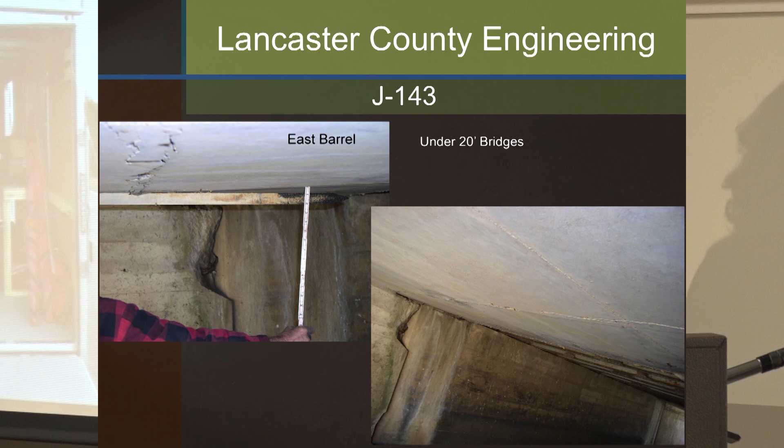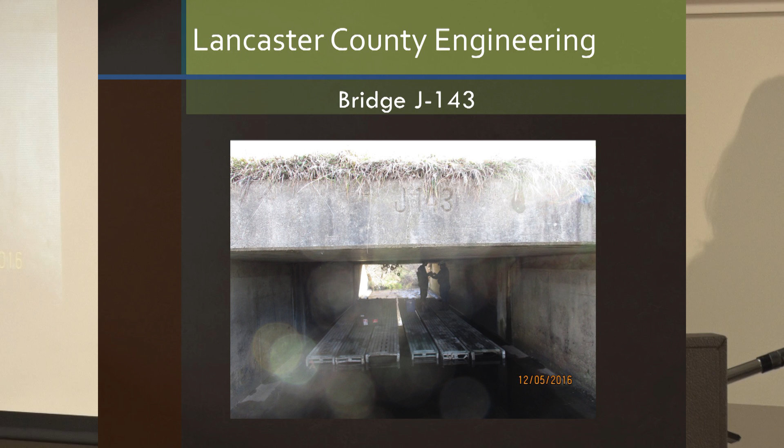If you can look at the next picture here, this is the University of Nebraska-Lincoln's mobile bridge load testing unit, and they were able to bring that out to the site, and we were able to actually instrument the bridge. The bridge, because it has a box culvert on either side and dirt actually in the middle, also has a rather large scour hole. So we couldn't stand on the dirt and instrument the bridge. We actually had to get scaffolding, and the university personnel, along with Lancaster County personnel, crawled across this scaffolding to instrument this bridge.

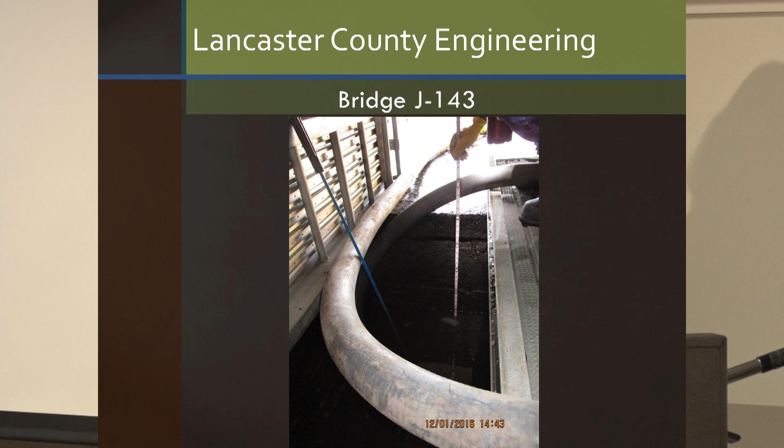If you can look at this picture, it's actually a picture showing that we did have to pump out the area between the two box culverts so that we could figure out what was going on and how big the void was in that area. Then the university began the instrument process, and here you can see one of the old 1938 bridge beams that has been prepped for a strain gauge.

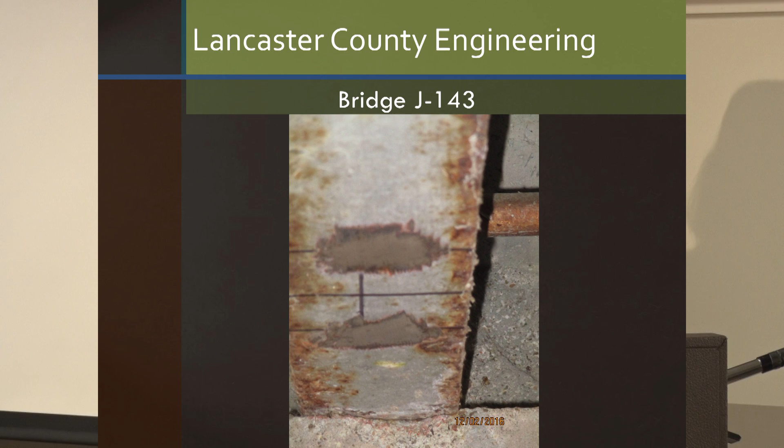I like to explain these strain gauges to people, like if you've ever had children, this is the type of strain gauge they put on your stomach to measure how intense the contractions are. It's the same sort of gauge, same sort of instrumentation, but for bridges.

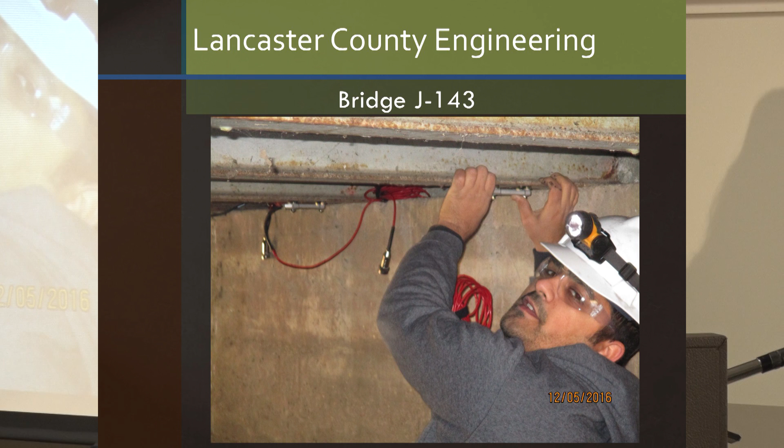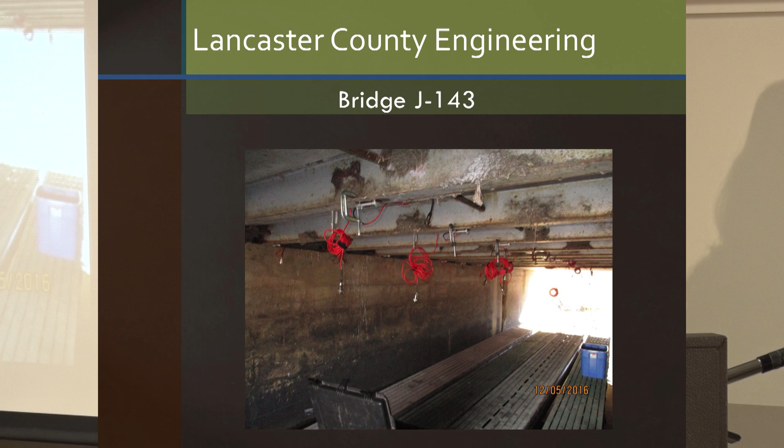Here is a picture of Ali, and he's not really a poser. Most engineers aren't, but he's simply holding his head out of the way so you can see what these gauges look like, although I will note that he does look great. Here's a close-up picture of the gauge and what it looks like. And you can see from this picture that several gauges were actually placed on this bridge so that we could determine how it behaved when a load was put on the bridge.

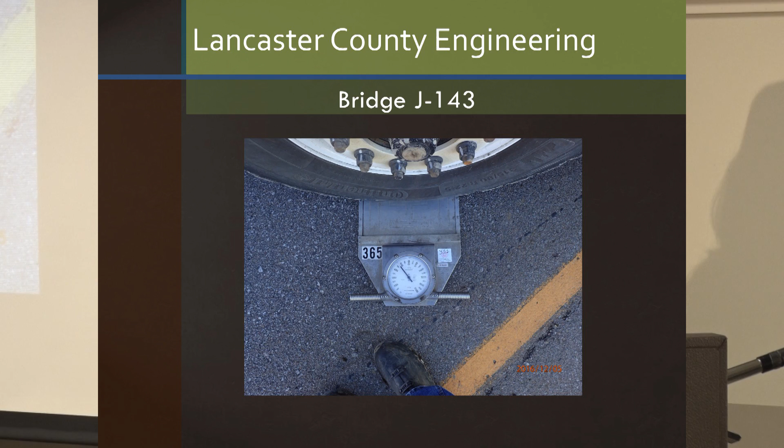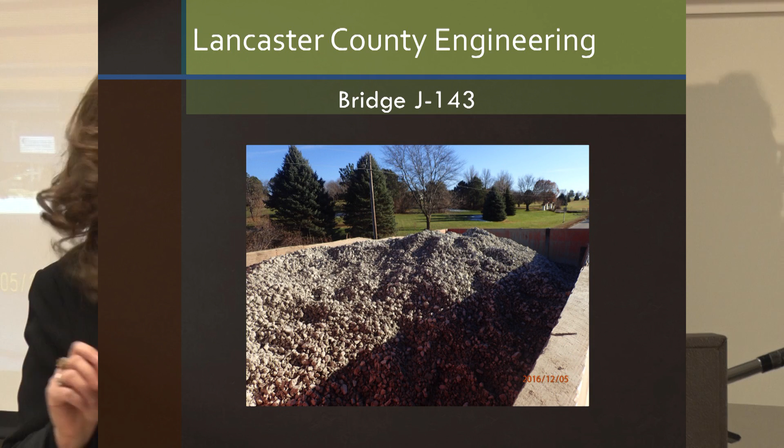This is a photo of the State Patrol, who actually brought out their scales and allowed us to weigh our trucks as we increased the rock inside of them. And of course, here's the picture proving that the truck, yes, it is indeed loaded with rock. These are the exciting things engineering is made of. And the State Patrol, of course, loading all the axles, verifying the weight of this vehicle.

We have 76 bridges in Lancaster County that are in need of replacement. That's about 25% of all of our bridges. That's pretty average for what my peer counties are also experiencing. 22 of those bridges are structurally deficient. That means they can't hold a heavy load as they were designed to. 5 of them are functionally obsolete. That means that they don't quite meet the modern criteria of our equipment. Maybe they're a truss. We can't get things over it the way we need to.

32 are scour critical. We've talked a lot in Lancaster County about our scour critical bridges. It remains a major issue for us. If the bridge is on the scour critical list, we have to inspect it after any 3-inch rainfall event or any time the creek flowed full for more than 4 hours.

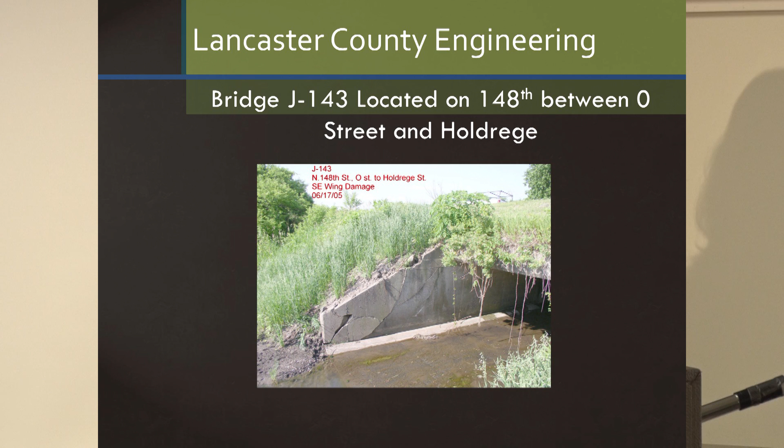And then we got in and we got to digging and looking at how we were going to issue this overload permit through this corridor. That's when we discovered that it wasn't really a box culvert. It was really two box culverts with a bridge in the middle. Huh. So how surprising was that? It wasn't something we were necessarily very happy about.

And I think when I called the Department of Roads and I spoke with Mr. Traynowicz, I said, have you ever seen this before? Because sometimes I call and I investigate and people say, oh, we see this all the time and this is how we handle it. And that's why it's really important for us to collaborate with each other as counties and with Department of Roads and the university. But in this case, nobody had really ever seen a buried bridge with a box culvert stuck on either end of it. So that's why we had to test it.

And that's why we really had to treat it differently, because we didn't really know what we had. And so we had to define what we have to ensure that the public was safe. And I really thank Department of Roads and the University of Nebraska for that. But if I could go back just briefly to the overload permit, there is a lot of discussion right now in the state of Nebraska at the county level, in particular with our ag equipment, about ag vehicles and their size and weight. And I know that the university is also doing some research on that. I look forward to their research being published so that we can determine how to better maintain and better rate our structures. So I know, Charlie, you had another question?

Well, overall, you indicated that we have a number of bridges that are either distressed or in need of replacement. And you've also closed some bridges already. I wonder if you could give us just kind of an overview of the situation as far as closed bridges throughout the county. Just how many you have. Sure. Ron, could you go to like the third to the last slide? So we currently have 11 closed bridges in Lancaster County. They really make up two different types of themes.

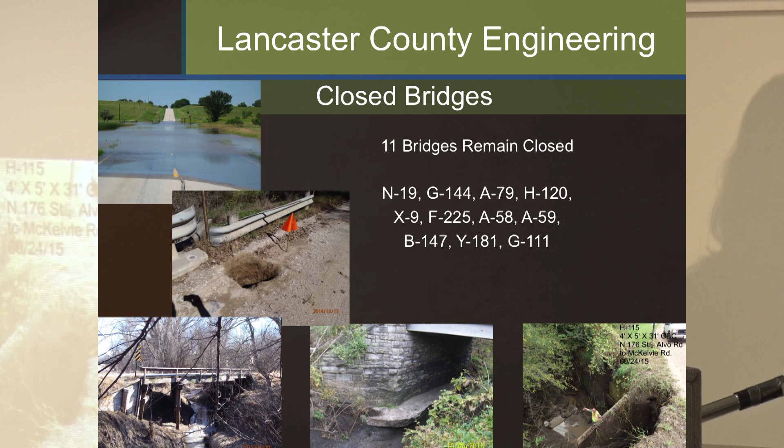Unfortunately, he did decide to touch the hazard sign and he was shocked. So, you know, we do have some dangerous situations, but what's intriguing about this bridge is it was built from surplus materials in the late 1970s after a flood for $500. So the county has spent about $45,000 since then trying to stabilize the bridge because it's the only access the city of Denton has to its well fields.

And I think what's interesting is when you look at bigger entities like Department of Roads or maybe Federal Highways, they would say, well, Pam, $45,000 isn't very much. Well, it's a heck of a lot when our maintenance budget for bridges has only been around $500,000.

So when I look at this bridge, the problem that we have with these type of bridges, we know we have about 50 of these, is it has a timber pile back wall, which has a tendency to get erosion behind it. And Ron, if you can go to the next picture after this. So as I talk about channel erosion, in the bottom center picture and top picture there, that's Bridge H66. That's the one on 112th Street that we recently repaired and reopened.

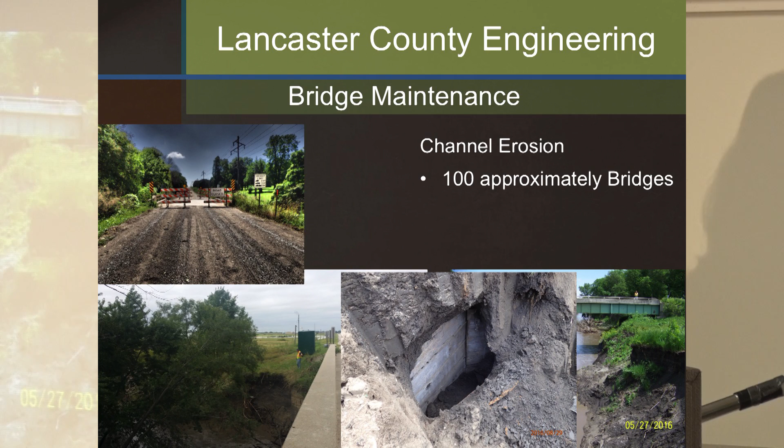But you can actually see the scour hole in the middle behind the timber pile abutment. We did probe after doing a scour critical inspection, and we actually had thought that we had found a little hole back there. Maybe it was like a foot back behind the bridge for 2 or 3 feet. When we went back to try to stabilize and resecure the soil behind that abutment, we discovered that the hole was really more like 6 feet wide and 5 feet high. It was much larger than we thought, and 2 feet back from the back of that timber pile plank.

So what we're really dealing with here is an erosion problem. In some cases, we can dig down, we can restabilize that soil, rock either side of that bridge, and stabilize them easily. In some cases, we can't. So what we're doing is we're systematically going through and we're picking the bridges that we know we can easily fix. At the same time, we're going back and we're getting the hydraulics and hydrology study done on those older bridges that we know we're going to have to replace.

The previous picture that showed bridge Y-181 in the bottom, we know that once the soil has washed out from under a spread footing, you can't really go back and pack it back because you never get that bearing that we need to set a bridge on again. And so that bridge is closed. It is in a grant program right now with Nebraska Emergency Management Agency. However, FEMA hasn't funded their grant program, so it's just waiting in the queue.

With that bridge, I mean, it's some of the interesting problems that I have when we go to finance bridges. If I start design on it, I can't be reimbursed. But it's a question of how long do we wait for the program to be funded when we know that the citizens would really like the bridge open. Is the new infrastructure bank going to give you any help with this?